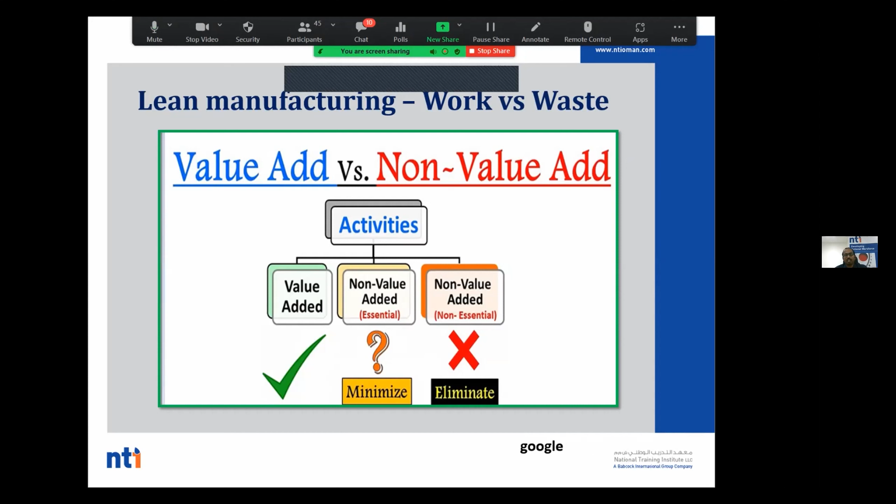Lean is about talking about non-value added activities and value added activities. So we'll just go through a slide which is called work.

Let us take a manufacturing sector. So what is called work? If any physical or chemical change happens to the work product, then it is termed as work. What about service industries? If a customer is ready to pay for that particular service or work, then it is termed as work. For example, any process.

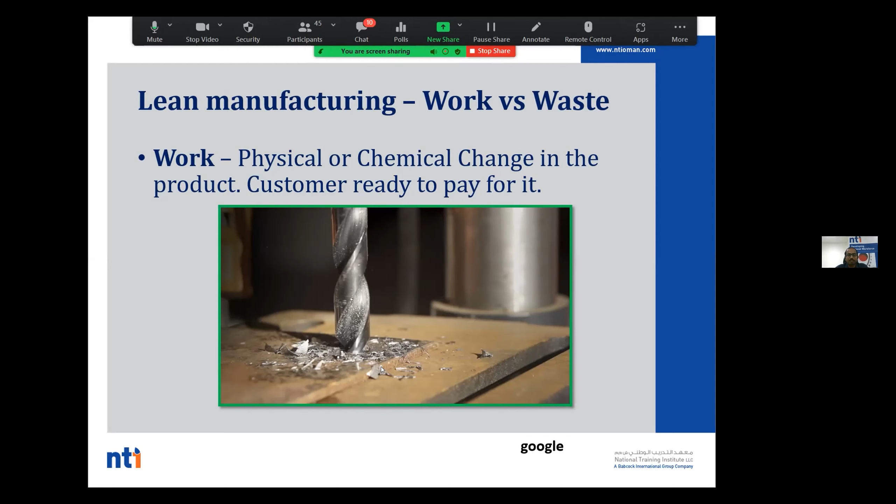Let us take, I'm doing drilling. So this workpiece, I'm drilling with the help of a drill bit. Here, some physical changes are happening to the work product. Then this drilling is called work.

Maybe I'm doing painting. After painting, there is curing time and solidification happening, so chemical change is happening there. So anywhere physical or chemical change occurs, we consider it as work. If the customer is ready to pay for it, then it is called work. Generally, it is about value.

And what is called waste? For example, same example, I'm drilling. For drilling, I want to change the belt. Here, there is no physical or chemical change in the work product. Even though this is essential to carry on our work.

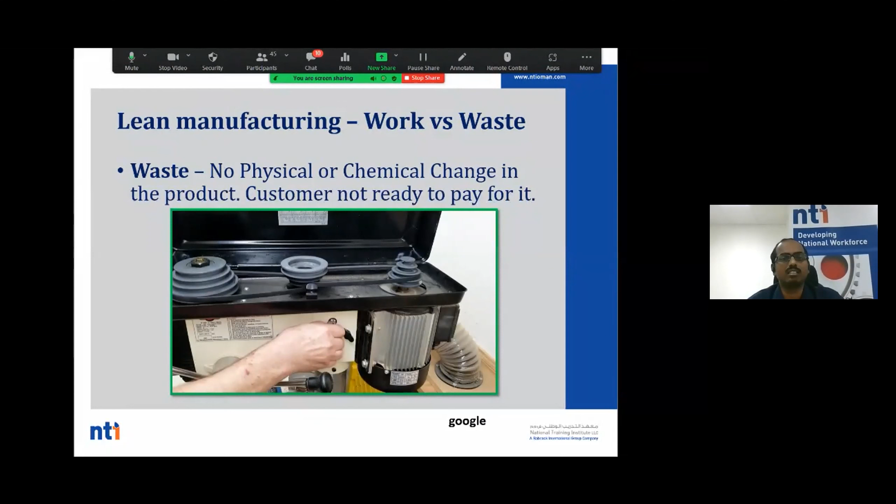So even though it comes under non-value added activity, it is essential, so we cannot avoid this. Even though it is termed as waste and non-value added, it is essential. So whenever the customer is not ready to pay for such operations or activities, we will call it waste. So here we discussed two words: work and waste.

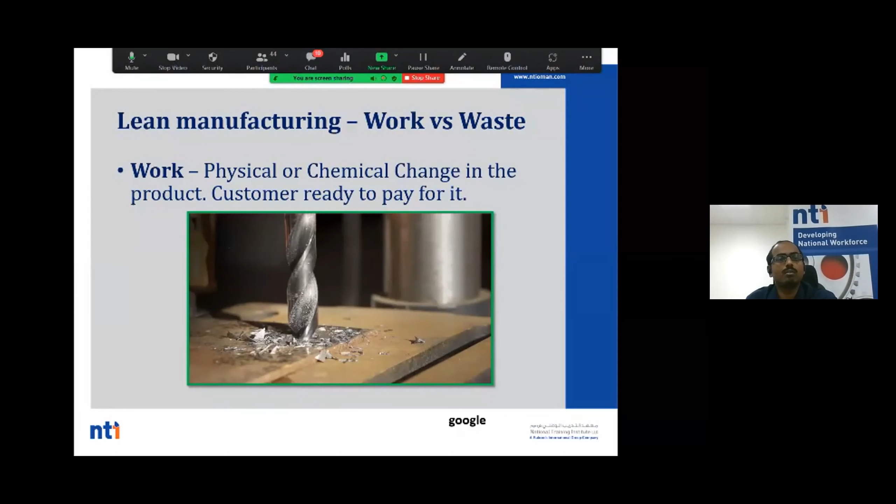So why do we have to discuss this waste? Because in our workplace, there will be more number of wastes. So what are the types of waste, or the three different categories of lean waste? Since I previously discussed, lean originated from Japan, the names of this waste are also named in Japanese words: muda, muri, and mura. These are the three different words.

So muda means non-value added activities. How can we define this? In muda itself, there are 7 types of waste. We will see muda later. Now mura means process variation.

Some companies, at the initial stages of the month, do production planning. For example, actually they want to produce 100 components, but in the initial stages they will produce only 50 or 75 components. Then at the month end, due to the target, they will increase the production rate. That is called process variation.

If you increase the production rate at the end of the month due to target, what will happen? Sometimes there will be a breakdown, or quality-less product will also get accepted because you want to complete the production target. So you'll be working more on that. That is called process variation, and as per lean process, any process variation is also called waste.

Some companies have person A working in the first shift and person B working in the second shift. Person A is doing welding and person B is also doing welding, but there will be a lot of process variations. There will be variations, right? All men cannot work the same. Variations will happen, and that variation is also considered waste.

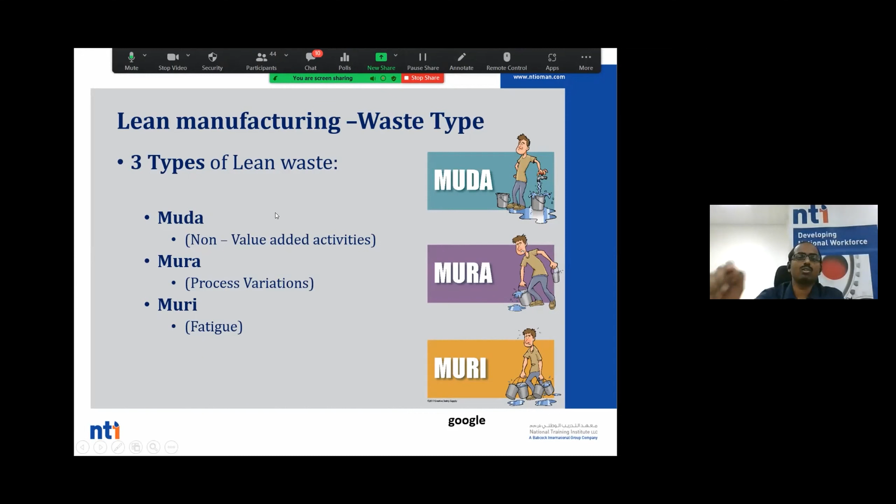Let's go through each topic. First, transportation waste. Think about your industry: a product is transferred from one place to another. Is there any physical or chemical change happening in the product? No. So this is called waste.

Transportation in industries is waste, but we cannot avoid it. After manufacturing, we have to deliver to the customer, so that transportation is essential. But we can reduce transportation waste within the industry itself, for example with a proper layout, focusing on how much a product moves from one stage to another.

In service industries, there may be too much email attachment movement, or for approvals, we have to go from one place to another to get files approved. These are all considered transportation waste, moving items or information.

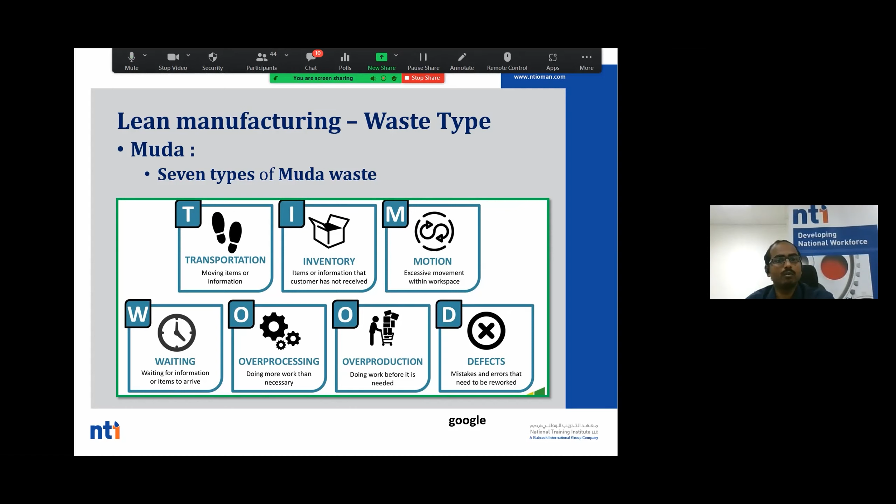So we'll have a short quiz on this. Whatever we discussed so far, you can poll it, it's about quick checking how many got it right. So we can stop this polling now, but around 65% of people answered the right one.

So the answer is inventory waste. Excess raw material in your workplace is inventory waste. Whether it is in terms of finished goods or work in progress, we can term it as inventory waste.

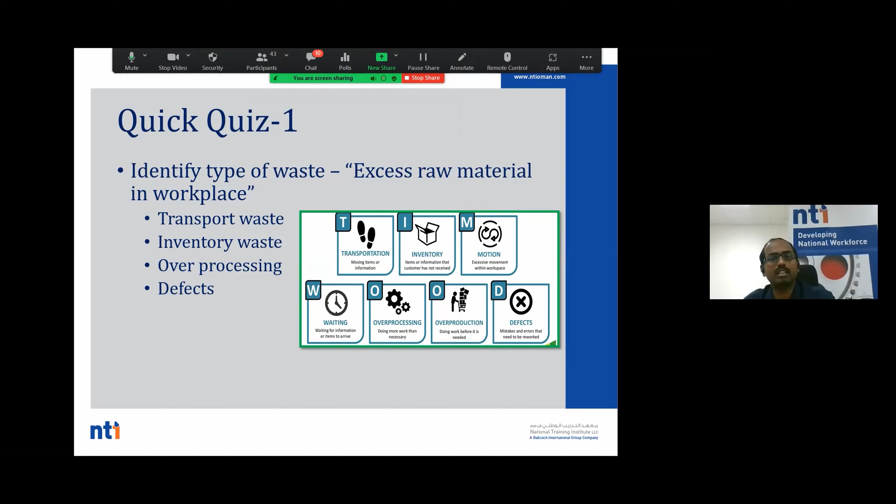So then we can focus more on lean manufacturing. We saw waste, now we are focusing on lean tools. There are more number of lean tools, around 24 tools have been there in lean. So today we are going to discuss about 5S.

Why 5S? This much of topic is there. Why did I select 5S? 5S is a basic lean tool which every organization has to follow, because it is nothing related to technical, and there is not much investment required. So every operator, all employees can participate in this. That's why I chose 5S, because lean is all about how many employees are participating.

So 5S is the only tool, or one of the techniques, where all your employees can participate. When all can participate, the organization's growth will be more. Apart from that, there's Just In Time, Kanban, TQM, Value Stream Mapping, Total Productive Maintenance, Single Minute Exchange of Dies, Kaizen, Poka-Yoke, Lean Six Sigma, Cellular Manufacturing, One Piece Flow, Continuous Flow. These are many tools available, but we are just focusing on one tool, which is called 5S.

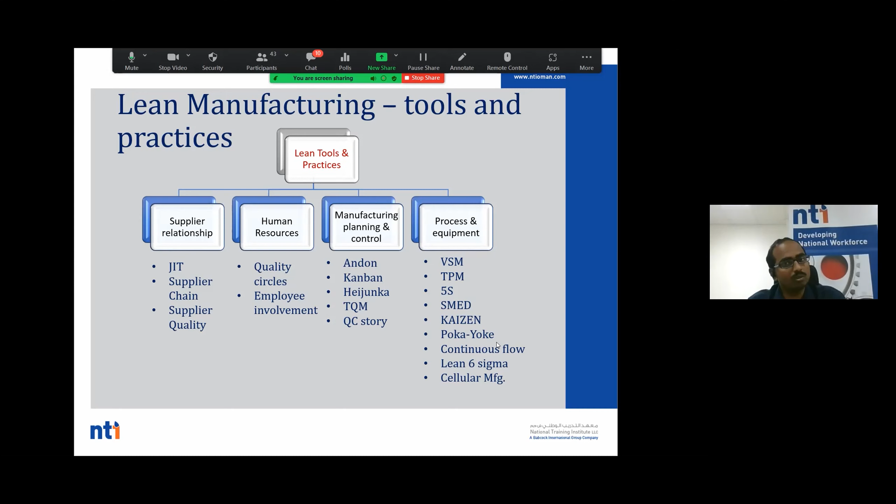So what we are going to do is change our workplace. We are going to put input as 5S, so we are having 5S in our hand. We are going to do a process known as workplace organization, and the output is waste minimization and ownership. So these are the outputs we are going to get from 5S.

So what is this 5S? I keep telling 5S, 5S, 5S - what is this 5S? Actually it originated from Japan. It is a 5-step systematic process, and all the steps start with the letter S. That's why it is called 5S. There are 5 steps, and the starting letter of each is S, that's why it is termed 5S.

It is a systematic method of organizing our working environment. Some of them will say 5S is cleaning - no, it is not just about cleaning. It is about making your workplace systematic, safe, and organized. Why do we require this? To achieve a better standard of living. So later, 5S will become a lifestyle for you.

So we can see what these 5 steps are: Seiri, Seiton, Seiso, Seiketsu, Shitsuke. Leave this Japanese word because it is very tough to remember. Once again, I'm telling you: Seiri, Seiton, Seiso, Seiketsu, Shitsuke. When we translate it to English, again 5 starting letters: Sort out, Set in order, Shine, Standardize, and Sustain.

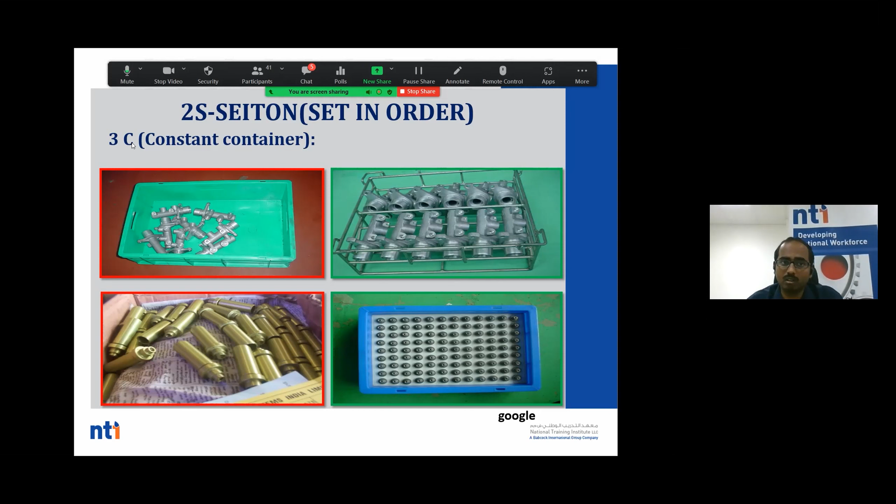And another concept: if it is an office, frequently used items can be arranged like this, because they are all daily usable items. And see this marking, outlining, everything. Why are they doing these activities? To identify which tool is missing, which element is missing. And like this, count-free racks. What are these count-free racks?

For example, here you see, I just placed a number 19 and here 14 is there. So how many items are available in this particular component? Without counting, I can tell 14. For example, if I remove here, 13 will be visible. So I can tell there are 13 items inside these racks. So a small improvement like this can be very useful.

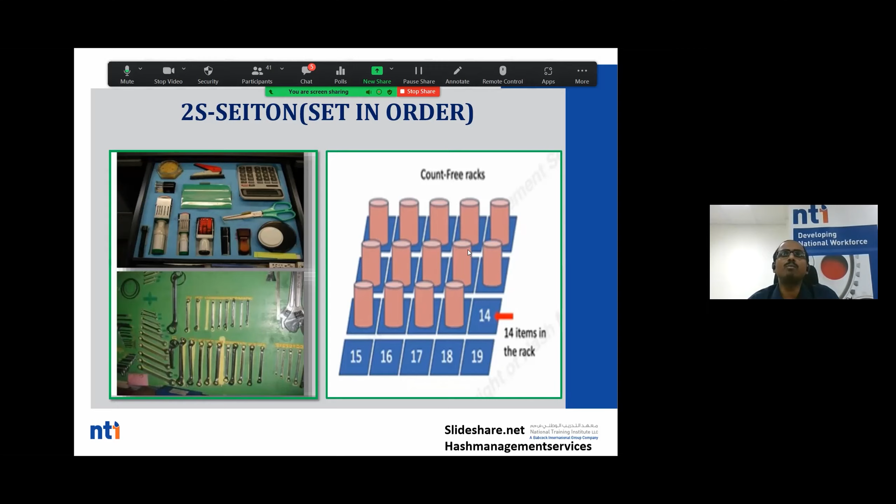Just now we finished 1S, which is sort. So see, just look at this space, how much space we got by removing unwanted material from our workplace. That item has been moved to the red tag area. So now we have a more spacious and safer working environment also.

So as a part of the process, we have to carry on with the second S. The second S's main motto is a place for everything and everything in its place. As we come from our home, work, and return back to our home, like that, every item in the industry has to be used and returned back to its original position.

So we made a concept and we discussed it with the process owner. The process owner told us some of the items he is going to use frequently and some of the items he is not going to use frequently. So based on his decision, we arranged the frequently used items closer to him, and the non-frequently used items we moved far away from him to avoid collision. So we did some outlining, masking, taping to show how we are going to implement this second S.

This is our rack which one of our staff is using. So we just marked the outline here, which means this is the position for this particular item, and we mentioned what is inside every rack. Okay, just look at one rack. See, in stationery we have mentioned what he is using frequently. We mentioned the names and gave positions for all the elements.

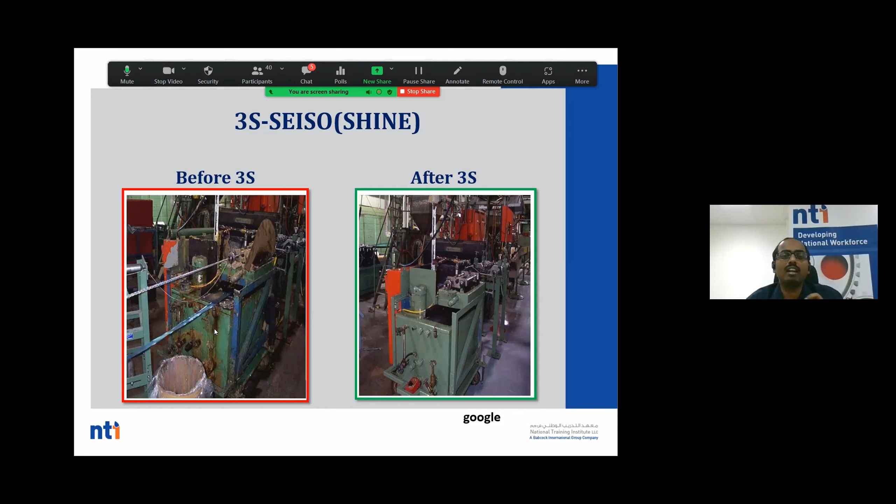So just look at before and after 3S. This is before 3S and after 3S. So I'm not telling you just to clean alone. Find out the root cause behind this and eliminate that root cause. That is the work of the third S.

Like this you can also do stickering. For example, more immigrant laborers will be working in your organization. For them, there will be a communication gap. So you just place a sticker.

Red color you have to do on a daily basis. Green color you have to do on a weekly basis. Pink color you have to do on a monthly basis. So they can check the conditions or they can inspect all the elements in the machines to ensure whether it is working properly or not.

So why are we doing shine? We have to identify defects. We are doing inspection. We are creating a neat and tidy environment. For that only we are doing shine.

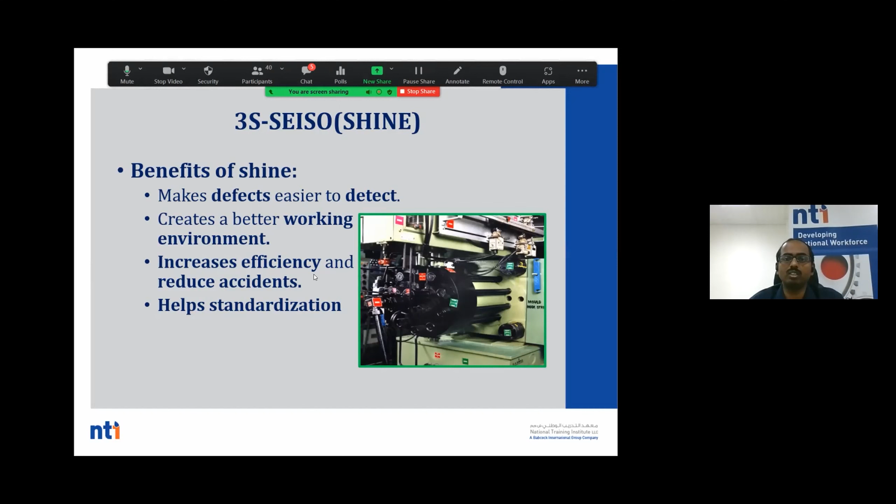Then the standardize step. It is very easy. So I have given 3 words here: simplify standard, systemize standards, and sanitize standard, which means 1S, 2S, and 3S. So we have to follow all these 3S. That is the 4th S. If you are creating some standards to maintain 1S, 2S, and 3S, that comes under standardization. So we can just look at this video.

So we have given some suggestions to implement the second S. Now it is time for the third S. The third S is about shine, to make our work area clean and tidy. Since NTI already has its own standards, where they are cleaning regularly like daily, weekly, monthly, we are not focusing on that part, as they already scored more marks in the pre-audit. So we are directly shifting towards our 4th S.

So 4th S means standardization. So what is standardization? Whoever, worker A or worker B, should work in the same manner. That's why we are implementing standardization here, because one staff member can work on day 1, and on day 2 some other staff members can work here. So we want to standardize this process. That's why we introduced a checklist.

So this checklist will be filled or updated every day in the starting 5 to 10 minutes. Only after filling this checklist can the staff members who are working in the zone start their work. So they will ensure all 3 S, which means sort, set in order, shine, have been updated till today. That is the only checklist they have to do in the early morning.

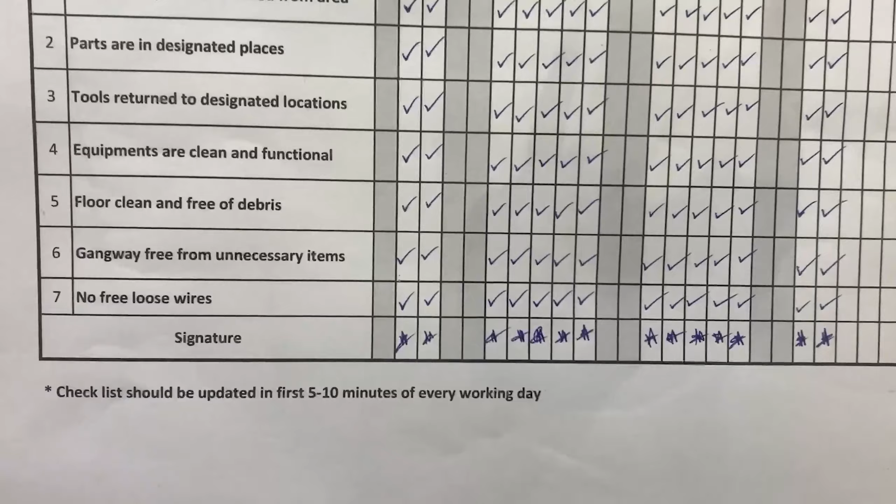This is the standardization checklist we prepared for updating the first 3 S: sort, set in order, and shine. The first point is about sort, unnecessary items, and the second point is discussing set in order, which consists of parts in their designated place, and all the remaining points cover the shine phase. So by updating this chart, we are ensuring standardization is happening every day. When the day starts, for around 5 to 10 minutes, each of our staff members is doing this work.

So standardization is how we are making standards of all 3S that every employee can follow. So this is one example here. In standardization, we can create a standard operating procedure also. My recommendation is, if you're creating a standard operating procedure, go for a visual standard operating procedure, and see some of the set in order, which can be systemized standards in 4S. So we can put one line here. If any file is missing, we can easily identify it. After using, we can replace the files also.

And the last one is about sustain. So what is sustain? We created some tasks, or some lean tools, or lean practices. We are following some of the industries. Day by day, it will reduce its impact. Like you are removing one stone in a ramp, and suddenly you leave it, it again comes to its original position. Like that, if you started 5S, we have to sustain it in our organization.

So how to maintain sustainability in your organization? There are a number of ideas for how we can develop sustainability. So we can check this video. So we stopped at standardization. Now we can focus on sustain, which is also known as self-discipline.

In this 5S, the 5th S, the management part is very critical. They need to support and motivate the people to do more in this 5S. So what this sustain indicates is we are going to conduct more audits, we are going to give some rewards, we are going to give some recognition to employees, then only total employee involvement will be there.